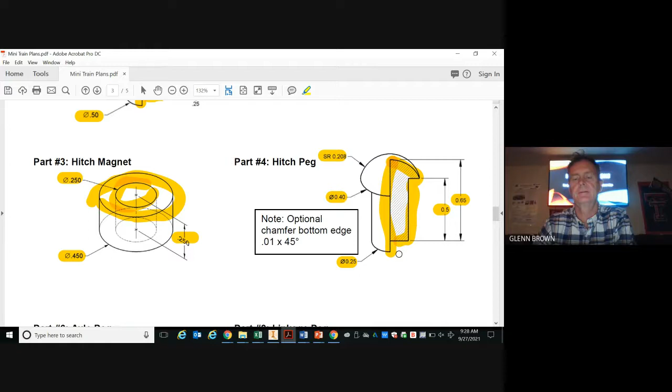And the best way to draw this, when you're looking at different objects to draw and you see something that looks like a cylinder, some people's initial response is to draw it a circle, like maybe in the top view, and then extrude that circle and then somehow put this cap on top. The more efficient way is to just draw half of this and then revolve it. So just draw half of whatever you're doing, in this case the hitch peg, and then revolve it.

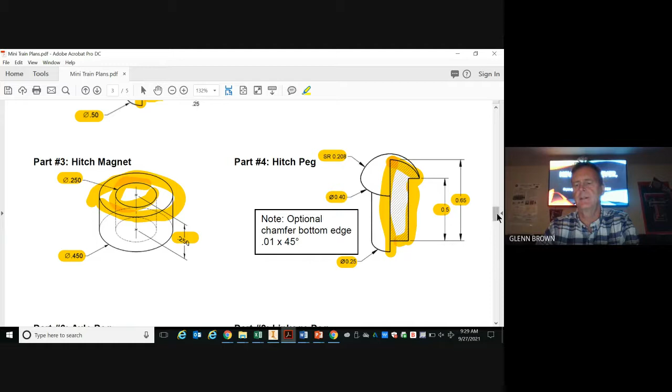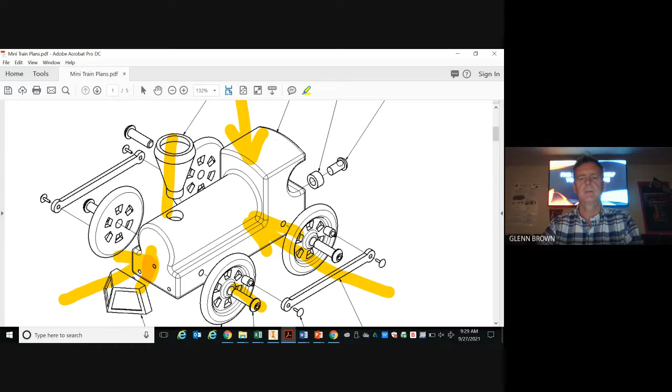Also, if we look at the assembly view of the train, we can see this is the hitch peg. It goes in this direction. So since we're basically cutting it in half and drawing half of it, we'll be drawing from the top view, because we'll be drawing it as if we were looking down on the top of it in this assembled position. All right, so let's get started on that.

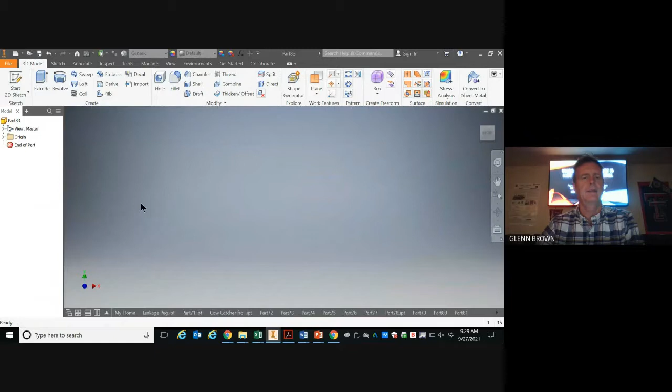Like always, you'll first want to open a new file, open a standard IPT file, and then, as always, start 2D sketch. Remember, everything is a 2D sketch. So we start with a 2D sketch, then we extrude, revolve, loft, whatever into the third dimension. So as I said, we'll start with the top view. We can double check that this is the top view because it says top on the cube over there.

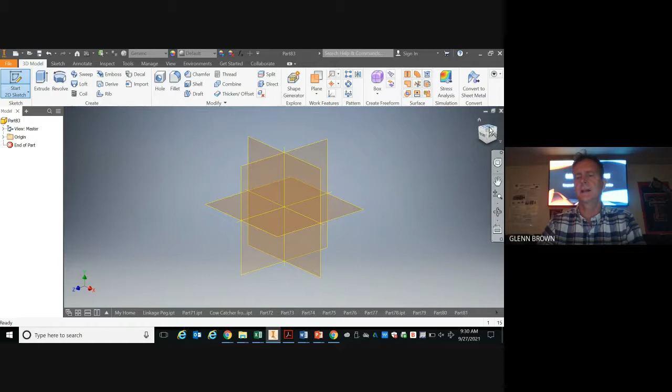Remember also that the coordinate system on Inventor, for whatever reason, turns it on its side, turns it 90 degrees. So if we look at top over here in the corner, we can see that it's turned 90 degrees. We just need to put it back to 0. So first of all, let's take a look at our drawing.

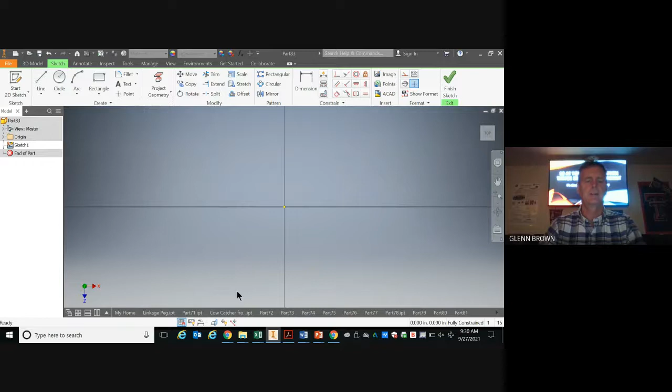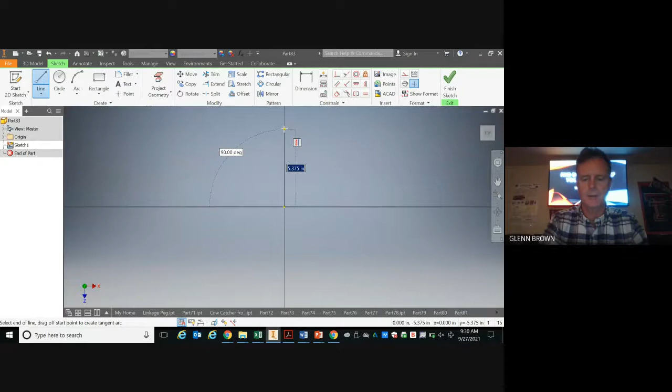We can see that from the very bottom here to the very top, to the crown of that sphere, is 0.65. So we'll make first a line starting at 0, 0 as always. We'll make that line straight up and make it 0.65. So now we have that. So we will right click and OK. And it's very small, but remember, you can either use the scroll wheel to zoom in or out, or you can just click top and it'll bring that into view.

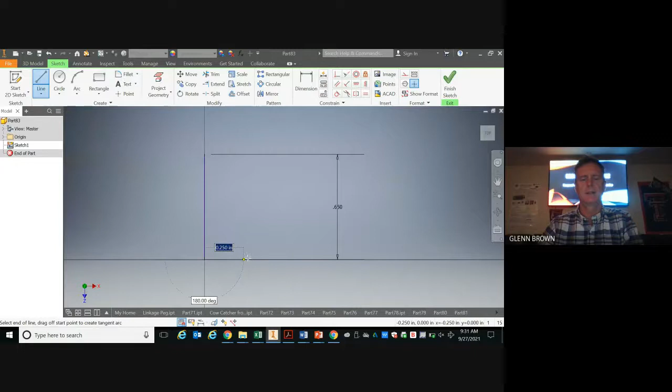So the next thing we want to do, we're going to draw half of it. So this tells us that there's a diameter. Remember, that symbol is for diameter, of 0.25. So we're creating this out of a circle that is a diameter of 0.25. We're only drawing half of it, so we'll make that 0.125. So we'll get a line, go back to 0, 0, come out 0.125. Okay.

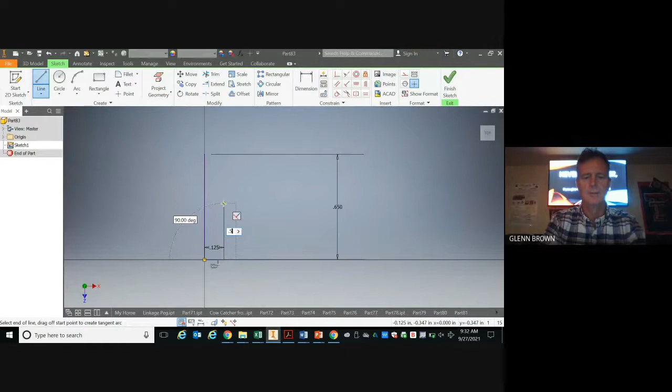Next, we're going to go up. So we're drawing this line now. We're going to go up 0.5. Go over here and go straight up 0.5. So this is where you're just going to kind of free sketch in, or this is at least the way I do it.

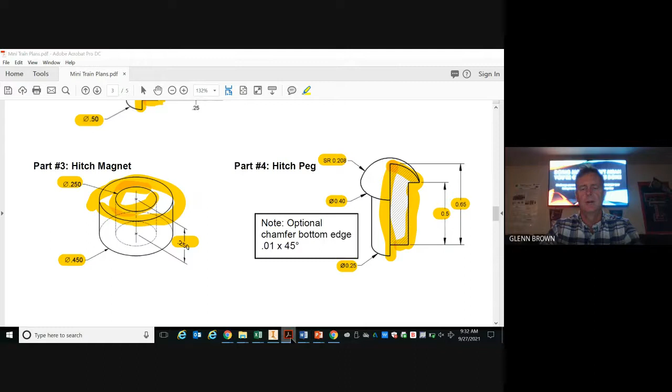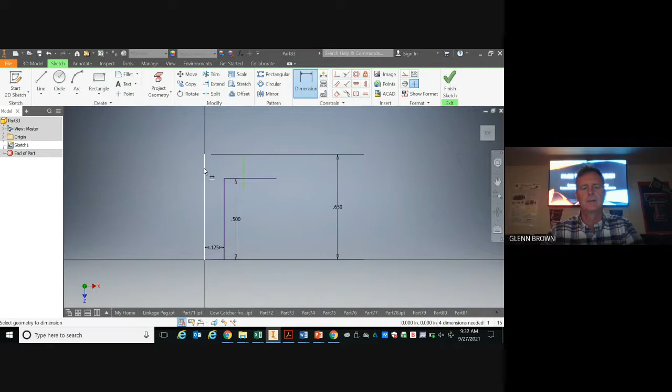So I know that this spherical radius is 0.208. So I'm going to use that 0.208 as my radius. I could start a line here, draw straight out 0.208, or what I usually do on parts like this, I just go out, right click and OK. So I just drew this line, no specific length, but I did draw it horizontal. Now the next thing I do is I come in here and just free sketch in a vertical line, right click and OK. Then I use dimension, create a dimension from here to there, and that's where I put in my 0.280.

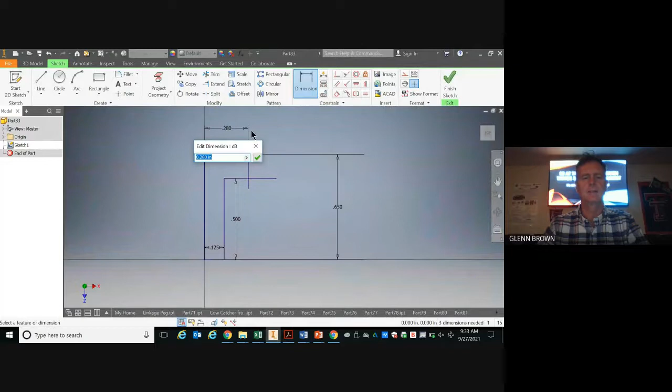So now what I've done is I've created this intersection right here. Ooh, I just noticed that I need to change that dimension. I've created this intersection here and this point here to draw my arc. So I do need to correct that. That's easy. Just click on it, 0.208. Say okay. All right. Now I'm just going to use trim to clean up my intersection here.

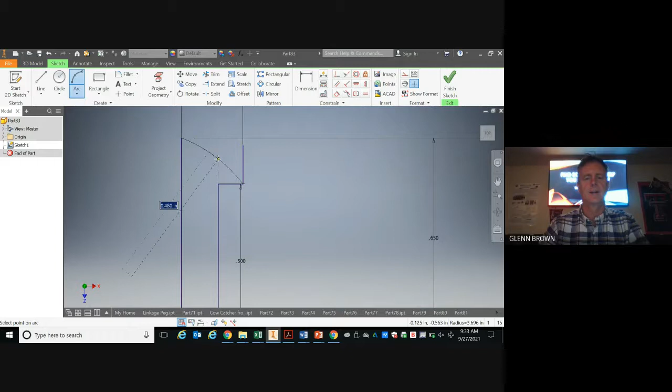And now I'm going to use arc. I want to use a 3-point arc. I'll snap to the top of my initial line. I'll snap to where my intersection is, and then I'll get this curve to kind of where I want it to be, and then I will go back and put in the radius, which is going to come from right here, 0.208. So I'll get that close, and then I'll put 0.208.

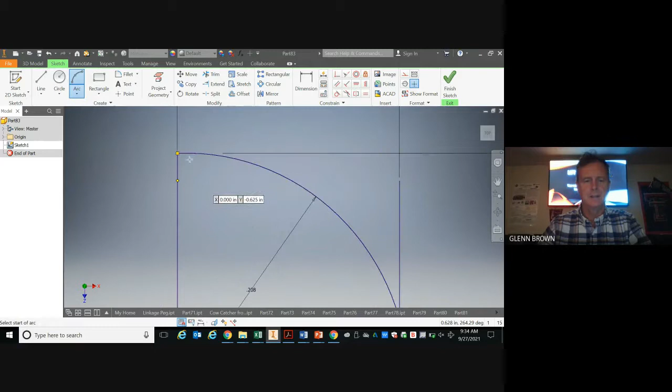And I'll come in and I'll check. And it looks like the crest of the arc gets there. We'll see in a future part where that doesn't necessarily work and we have to adjust. So now we've got this. We've got our basic shape, right? It matches here.

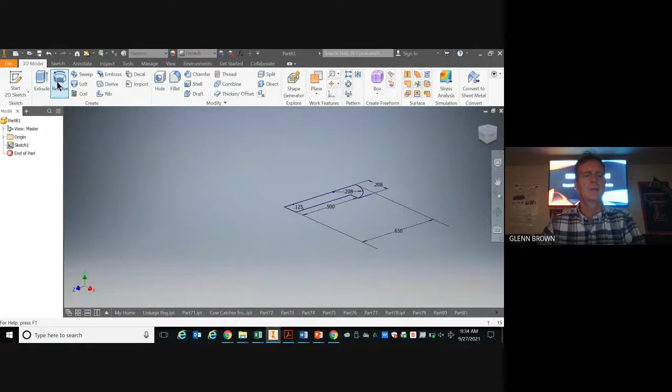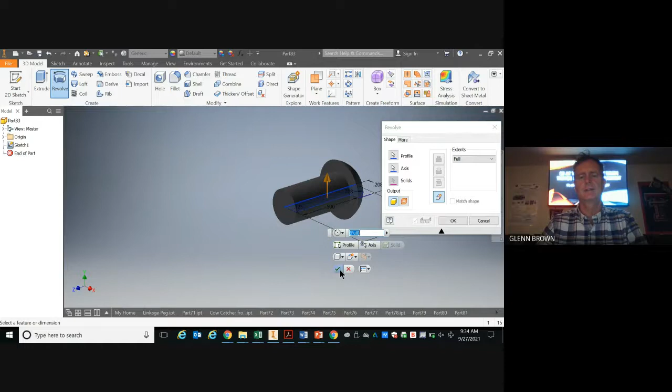So now we can finish sketch, go to revolve, and just identify our closed loop as the profile. We need to tell the axis. If you've got a newer version, it says in red, select axis. And then we'll just select this line here. And that creates your hitch peg. And that's really all there is to that one.

Remember, always save your files so that you don't lose them. And you're good to go.